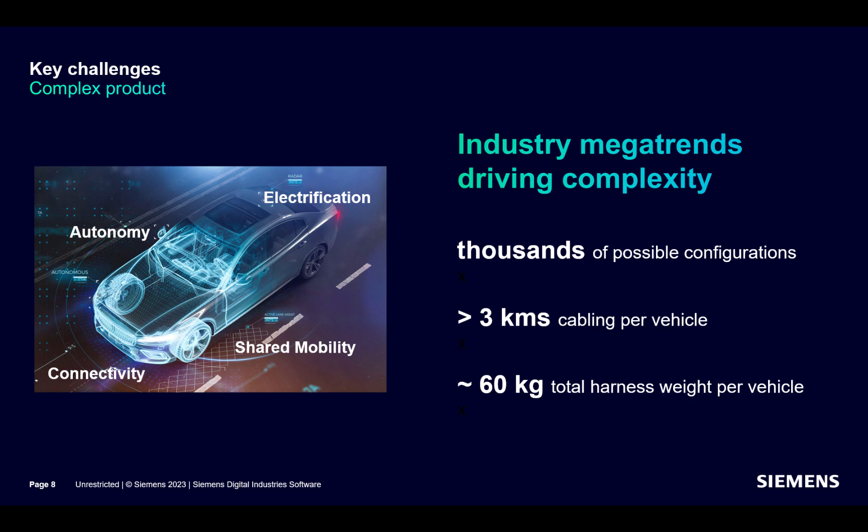This leads us to an obvious question. How prepared and equipped are we to manage such complexity? We understand that conventional wire harness design and manufacturing methods are starting to creak under the weight of the product complexity caused by automotive industry trends.

The need to ensure availability of consistent data and its seamless exchange between stakeholders is very important. But this can be a tricky job, especially with traditional siloed domains and disjointed engineering and manufacturing systems. This clearly impacts overall productivity of stakeholders.

Manual re-entry of data leads to error-prone and incoherent data throughout the flow, directly impacting product quality, and such mistakes cost money. This inadequacy also leads to longer cycle times and poses a serious challenge when it comes to adhering to budgets. Now, if that's the case with first-time designs, with the frequency of incoming changes we have today, change management for sure can be quite overwhelming.

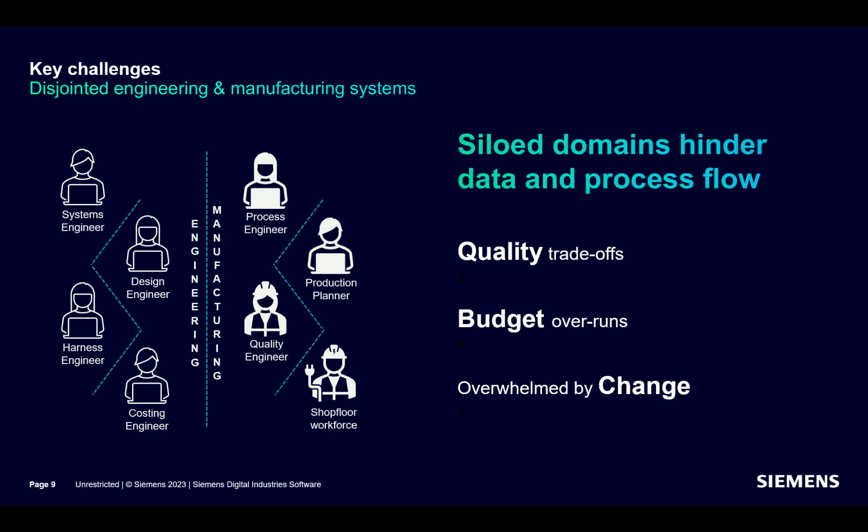In a highly price-competitive industry like the wire harness business, manufacturing efficiency is paramount, as it can directly eat into the bottom line. Optimizing production could mean either before the start of production or during change implementation, with traditional practices like prototyping and physical tryouts can be time-consuming, unsustainable, and above all, unprofitable.

The accelerating pace of program milestones also means that often engineers have little time to optimize the manufacturing process, leading to a suboptimal process. So most of the times, optimization efforts continue even after production has begun and can be even more challenging to optimize whilst ramping up.

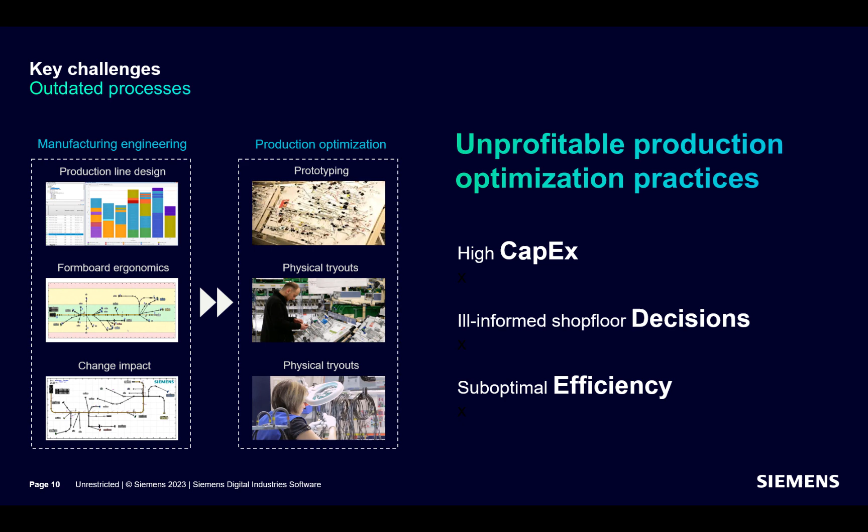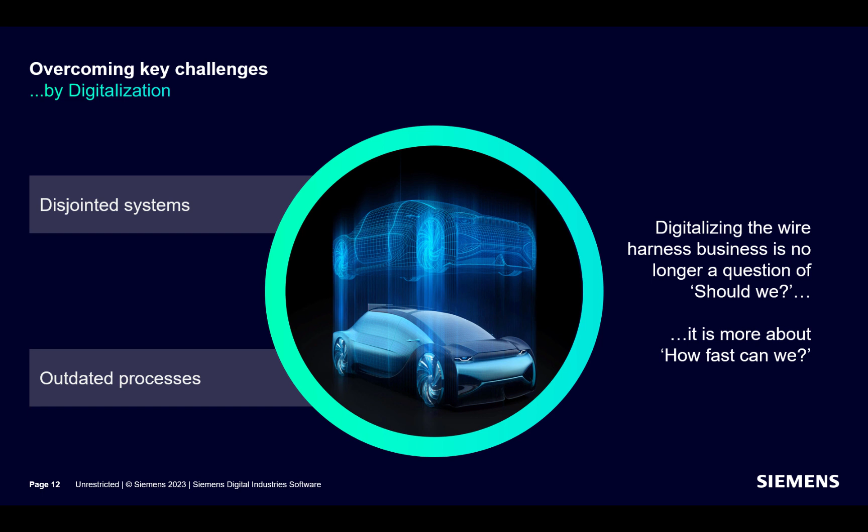Tackling such challenges while remaining profitable calls for a complete business transformation. But how? The answer lies in digitalization. Digitalizing the wire harness business is no longer a question of should we, it's more about how fast can we. And this is where the Siemens Accelerator can be of help.

Before we speak about how the Siemens Xcelerator can help digitalize your wire harness business, let's take a look at the Siemens philosophy of a true digital enterprise.

In a nutshell, it comes down to consequently combining the real and digital worlds with a comprehensive digital twin approach, and looking at the life cycle of both the product and production, thereby enabling a continuous loop of optimization. And with our digital enterprise approach, we do exactly that.

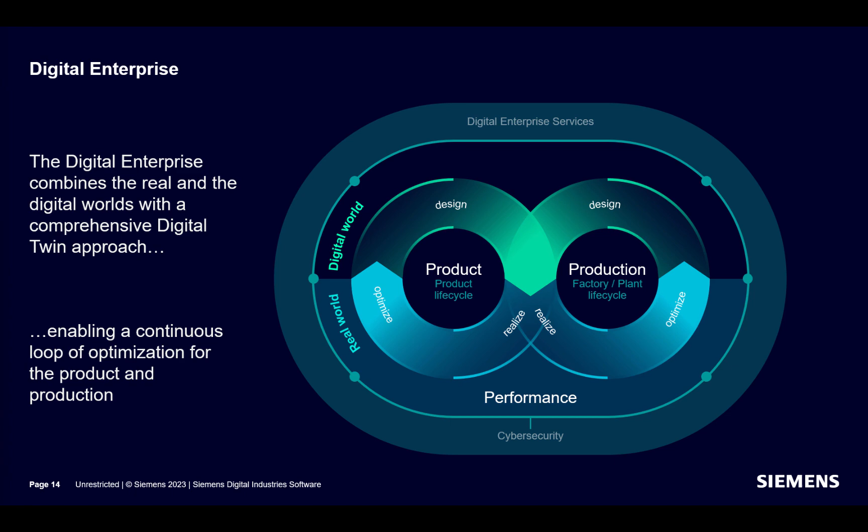By working with our comprehensive digital twin, you can integrate the entire product lifecycle and the factory or plant lifecycle, which were until now entirely separate worlds.

The digital twin of the product enables interdisciplinary collaboration and concurrent development to create an accurate virtual representation of a new product in no time. It comprises the MCAD, topology, schematics, and the harness designs.

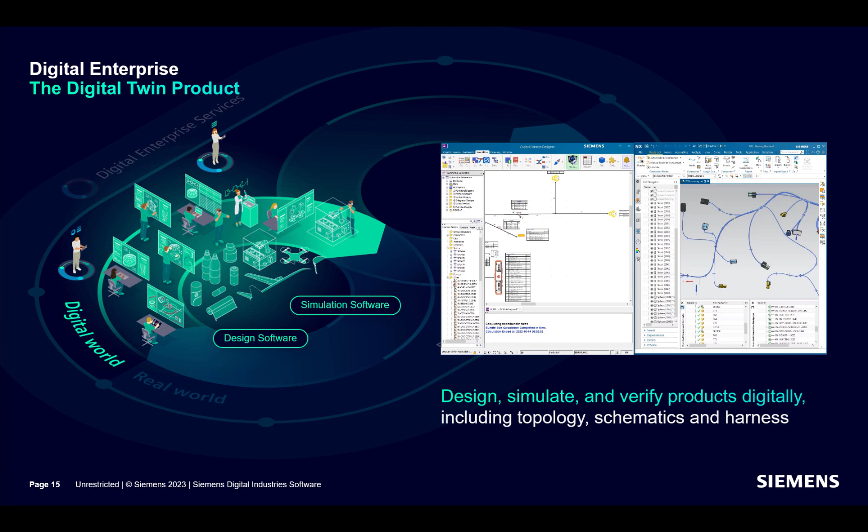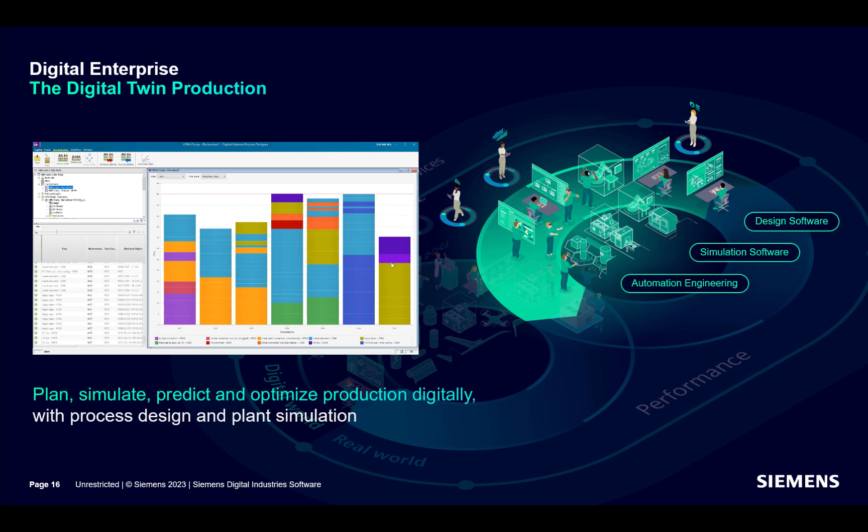The digital twin of production, on the other hand, comprises the manufacturing process design, a balanced distribution of tasks across workstations, and a virtual model of the shop floor, which is modeled to optimally manufacture the wire harness. Such realistic simulation of machines, lines, and complete plants is the foundation for flexible and efficient manufacturing.

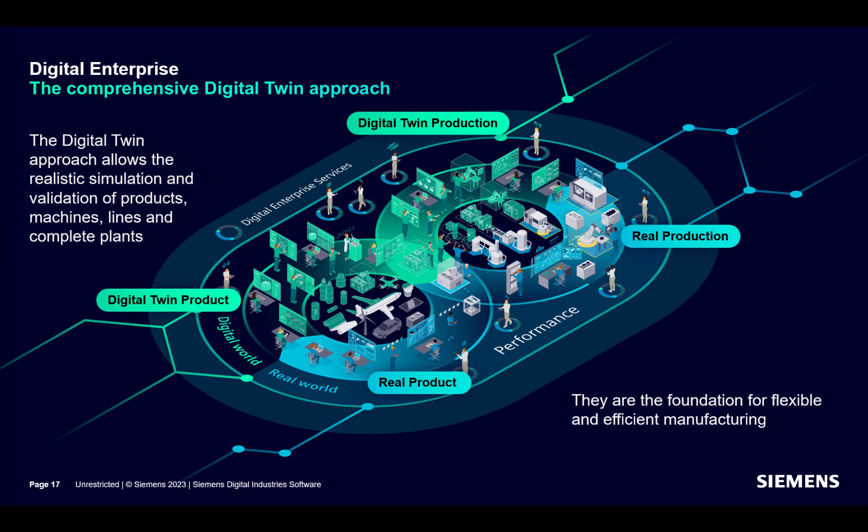By connecting the life cycles of the product and production, you enable a flow of data, which means that all stakeholders involved in the development of the product, the planning of the production, and the production itself always have access to the right information. The digital enterprise integrates both life cycles seamlessly, and the generated data, or the performance as we call it, enables a continuous loop of optimization both for the product and production.

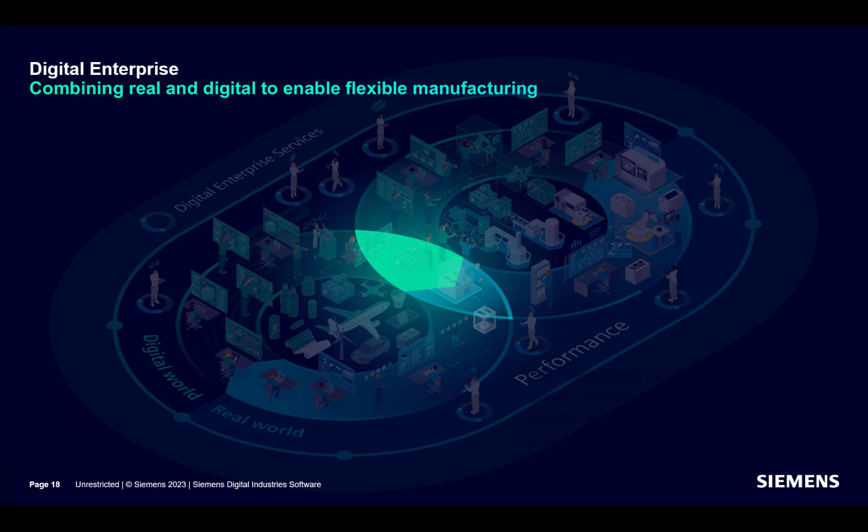Now that the product and the production process are designed, engineered, simulated, and validated in the digital world, we can actually make sure that everything works in the real world as planned and intended. The product design defines the engineering bill of materials, and by using the digital twin of production, the bill of process is generated. This way, the product and the entire production process can be simulated and validated well in advance, no matter where the product is finally manufactured. This ensures that it's always produced in the same quality everywhere, exactly according to the given specifications.

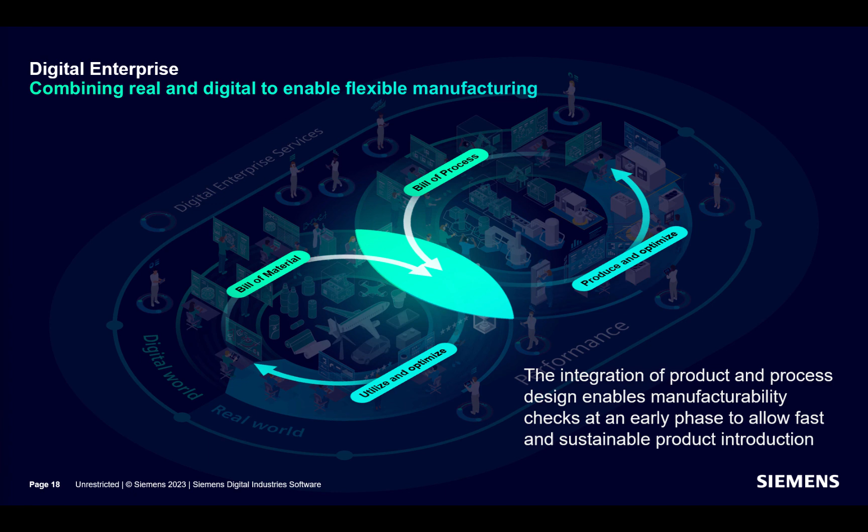What we have just seen is what we believe is a true digital enterprise. It's about having access to the unlimited power of data, gain valuable insights to make fast and confident decisions, and to create the best product and production. The comprehensive digital twin approach to design, simulation, and validation hence allows us to make it right the first time.

Now let's see how the Siemens Xcelerator can help digitalize your wire harness business.

Xcelerator is a portfolio of software, services, and an app development platform that speeds up digital transformation. Xcelerator enables customers to create their own comprehensive digital twin, flexible and adaptable to their own unique requirements and business models, using data and insight to predict and adapt products to future needs. For today's agenda, we shall look into the wire harness specific use cases from two unique products from the Xcelerator portfolio, Capital and Tecnomatix Plant Simulation.

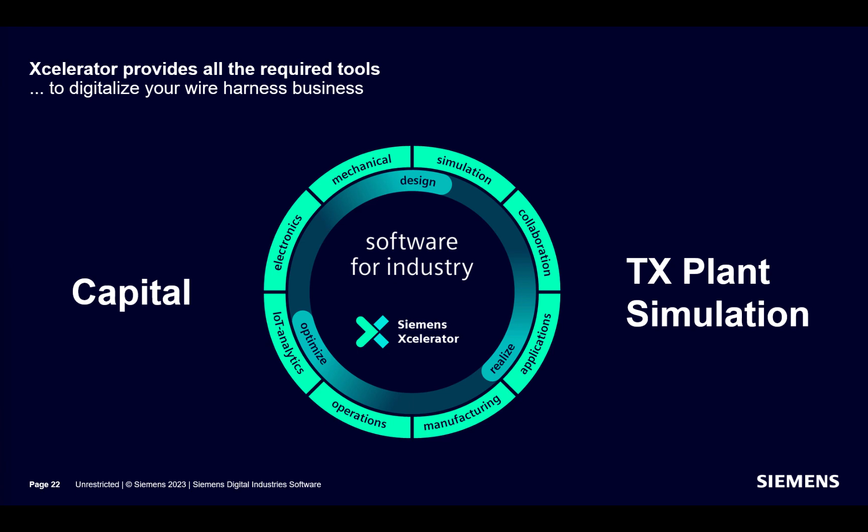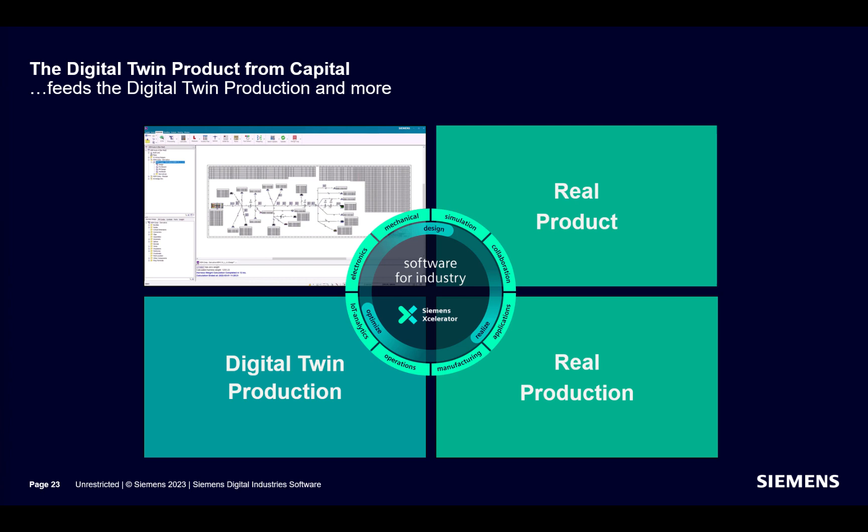Capital delivers the digital twin product. It comprises the architecture, topology, schematics, and harness design. And not only that, it also feeds necessary ingredients like the bill of process, the manufacturing bill of materials, and production line scenarios to design and validate the digital twin production. It also delivers manufacturing information and documentation like the form board drawings and operator work instructions required for use in real production.

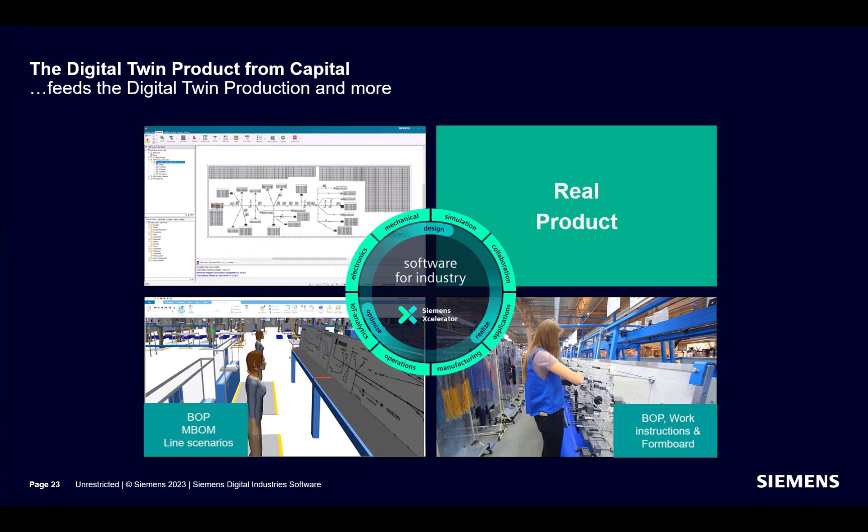And plus, it delivers technical and diagnostics documentation required to maintain the real product throughout its life cycle. The most important point to note here is that none of these entities are isolated. They are all connected and supported by a coherent digital thread.

Also, this data-centric approach ensures that all stakeholders always naturally have access to the right information. The use cases we will see today are focused on the left side of this quadrant, more on the digital twin product and its integration with the digital twin production, especially after a wire harness has been fully designed and engineered.

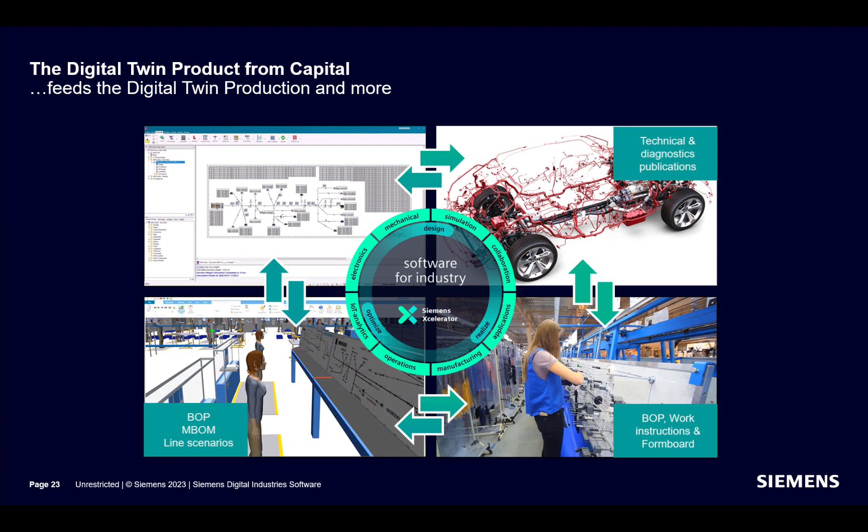For those of you who are familiar with Capital, the tool offers a powerful graphical harness design environment, enabling harness engineers to effectively capture and describe design intent to create fully detailed and validated harness designs rapidly and accurately. Such fully engineered harness designs are now ready for manufacturing engineering and costing. We shall now look into a few use cases, beginning with process design, costing, and balancing tasks in Capital, and later on, see the usage of the Capital bill of process and line scenarios to simulate production with plant simulation.

Manufacturing process engineers are often faced with the challenge of determining an efficient pattern of sequence process steps that result in the correct assembly of the target harness. Usually, more than one possible pattern will exist. The optimum choice depends on the specific manufacturing capabilities of the factory or factories in question.

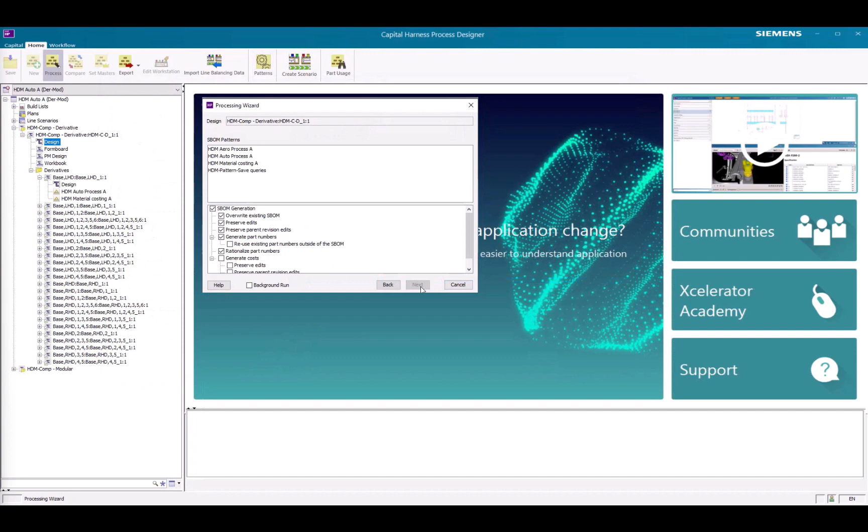Capital facilitates automatic creation of an efficient manufacturing scheme for each harness to be built by decomposing harness designs against previously captured descriptions of manufacturing capabilities, using a reasoning engine that incorporates wire harness assembly logic. Process engineers can rapidly and accurately synthesize harness build processes, tasks, manufacturing times, and more from a harness design.

An easy-to-use graphical process design tool generates multi-level builds of process and materials to feed downstream systems, thereby raising the efficiency of process engineers and reducing cycle times.

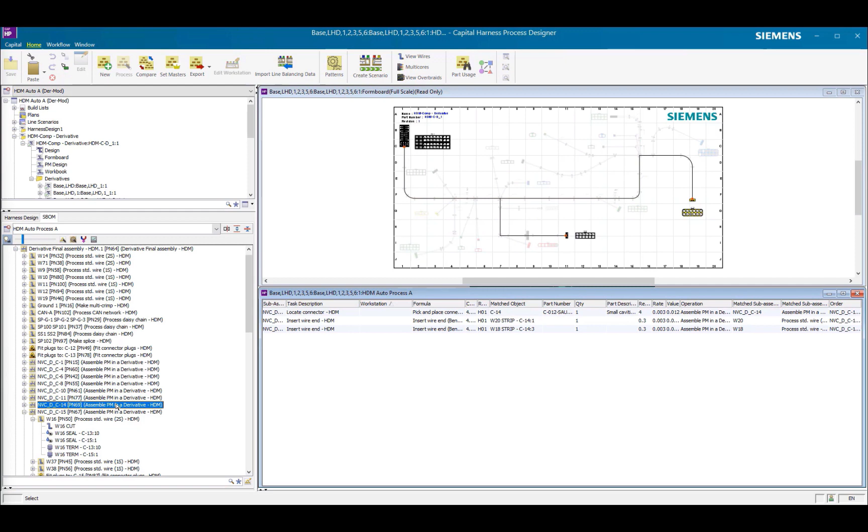Configurable operations, tasks, and factory models capture best practice process expertise that can be applied across multiple manufacturing sites, improving standardization.

Automated identification of common subassemblies eliminates subassembly duplication and cuts manufacturing costs.

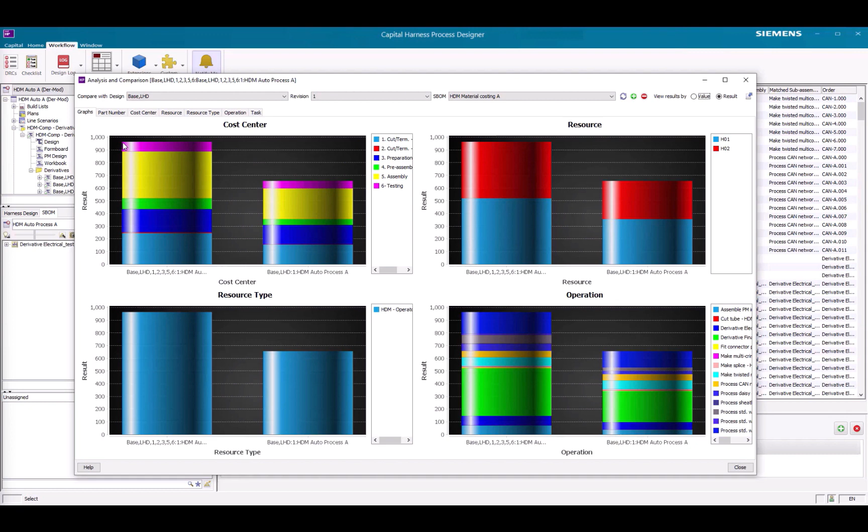Engineers can hence use Capital to capture and apply organizational IP and best practice techniques to manufacturing process planning and cost estimation tasks. It facilitates fast and accurate process planning, making time available for engineers to create multiple what-if scenarios to be compared with each other and analyzed for optimum manufacturing efficiency.

The generated bill of process and labor times can now be used to distribute and balance assembly tasks across workstations.

Manufacturing engineers can leverage capabilities offered by Capital to design efficient production lines, use existing manufacturing resources as effectively as possible, and quickly and accurately distribute manufacturing tasks across workstations on a production line.

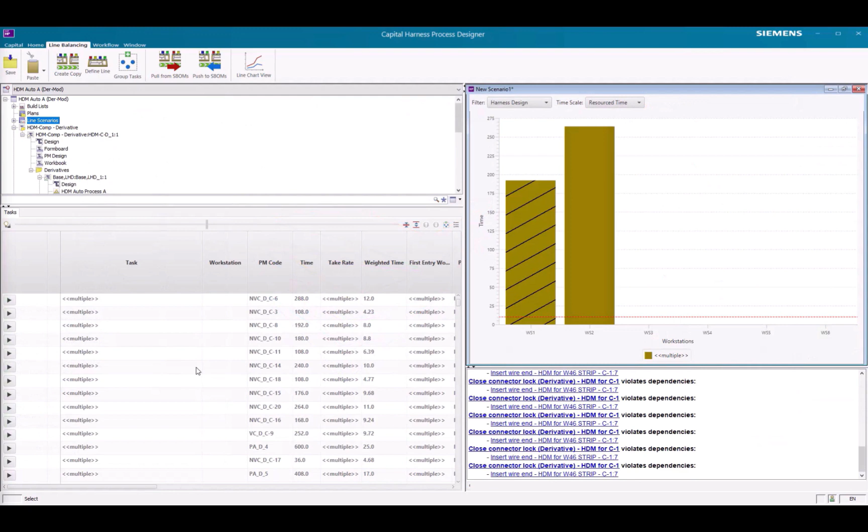Tasks can be assigned to workstations by simple drag and drop functionality, with constant guidance showing the earliest workstation where a task can be performed based on predefined task and material dependencies.

Warning messages immediately notify if a task is assigned to a workstation before the material is present or before a prerequisite task is complete. It lets engineers react quickly to new situations like changed take rates, helps inform better shop floor decisions, and ultimately reduces the time to profitability, thereby allowing time for multiple scenarios to be compared and analyzed for optimum efficiency.

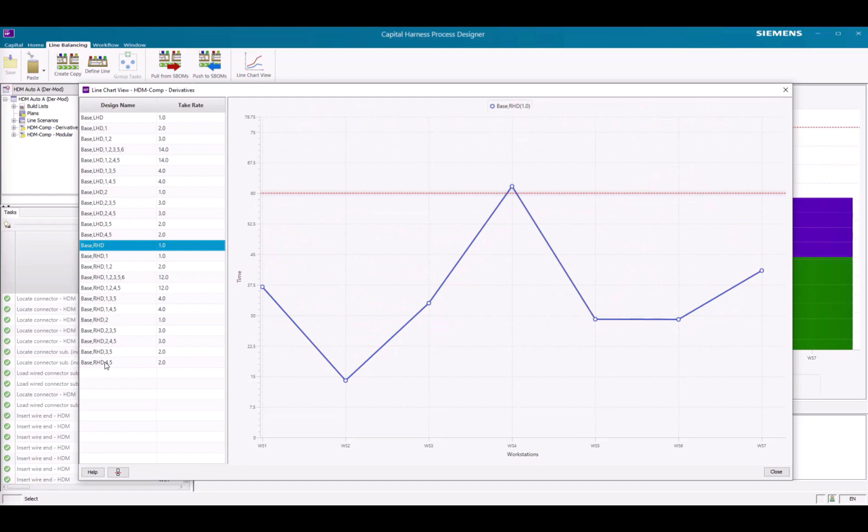Let us now see how the generated bill of process, labor times, and a balanced distribution of tasks across workstations can be used to simulate production.

As we have just seen, a manufacturing engineer working with Capital was able to design the entire manufacturing process and can now seamlessly deliver the resulting information to drive the digital twin of production, built based on the specific manufacturing capabilities of a given factory.

But before we can begin to simulate production using the plant simulation software tool, the plant model also needs to be fed with customer order and project relevant information like volume forecasts and take rates from an ERP system, for example. All this information can then be used to run a production simulation and virtually optimize production, all of this long before building the real production lines on the shop floor.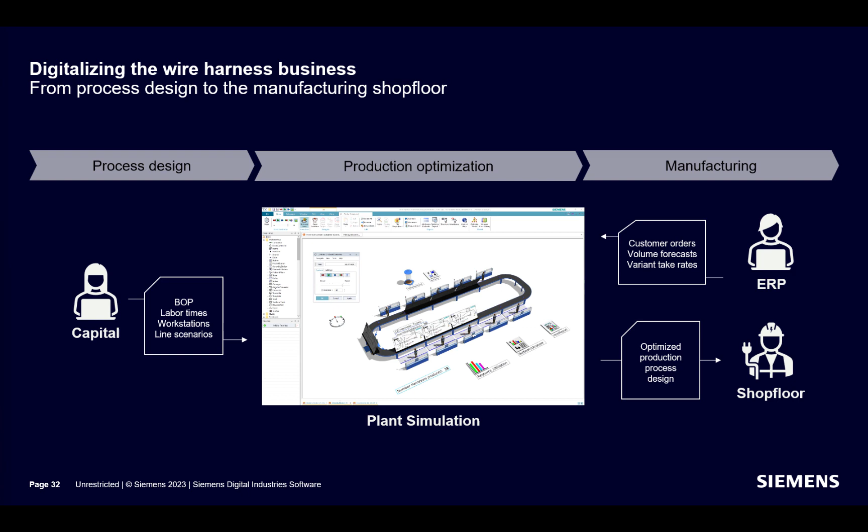Tecnomatix Plant Simulation is a tool used for simulation studies and experiments of material flow, operations, staffing, and logistics in any type of production. Plant Simulation equips engineers with a variety of tools and capabilities.

3D visualization helps validate and optimize production layout. Dynamic charts, on the other hand, let engineers monitor and optimize resource utilization. Sankey diagrams and bottleneck analyzer can be used to analyze and optimize material flow and throughput, while experiment manager and energy analyzer enable engineers to optimize the overall production process and energy consumption.

We shall now look at some of these example use cases.

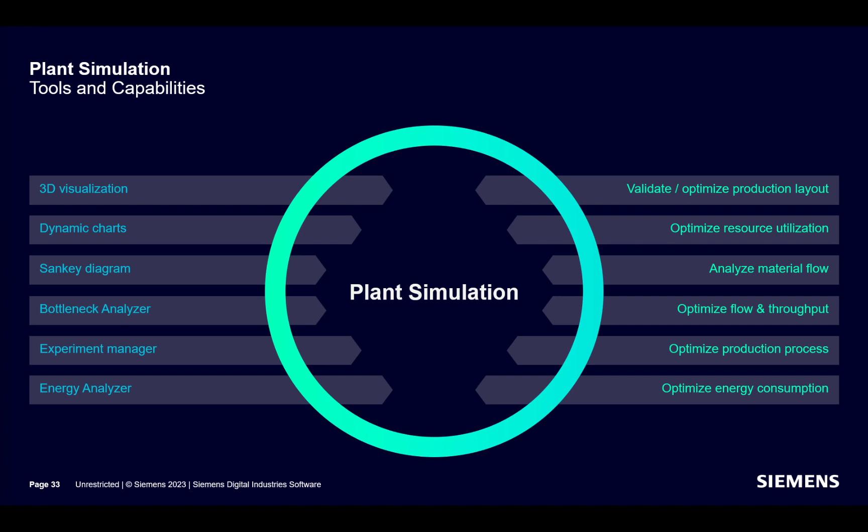There are several stakeholders, starting from the OEM to the Tier 1 harness manufacturer, that need to understand the layout and capabilities of a harness manufacturing facility. The 3D visualization feature lets users do exactly that, and more.

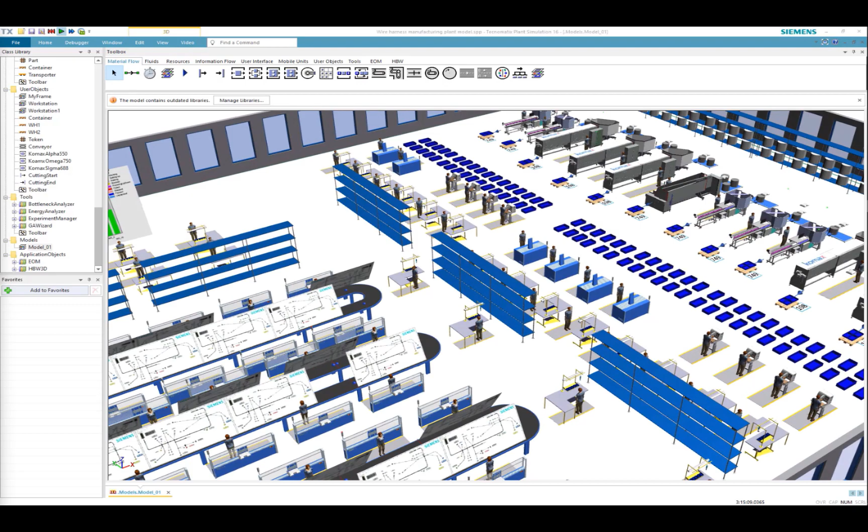This can be a very useful tool to virtually build and visualize an entire harness manufacturing plant. For example, in case of a completely new production site, it can help starting from the early conception phase with production layout design and CapEx or investment planning. Later on, it can be of significant help during the RFQ phase with shop floor square meter or space calculations. It can also be a powerful tool for harness manufacturers to virtually demonstrate production capabilities to customers, or to propose where a new production line can be added to accommodate a new product for a given customer. Today, most of this work is painstakingly done using legacy CAD systems, spreadsheets, and slides.

Resource planning and optimizing resource utilization, both human and machine, can be quite a daunting task, especially when the real production doesn't exist yet. Let's see how dynamic charts can help in this regard.

Dynamic charts such as these help users analyze simulated resource utilization statistics for the given production conditions. These statistics result from the simulation of a production flow, employing machinery and equipment modeled to replicate the specific manufacturing capabilities of a given factory.

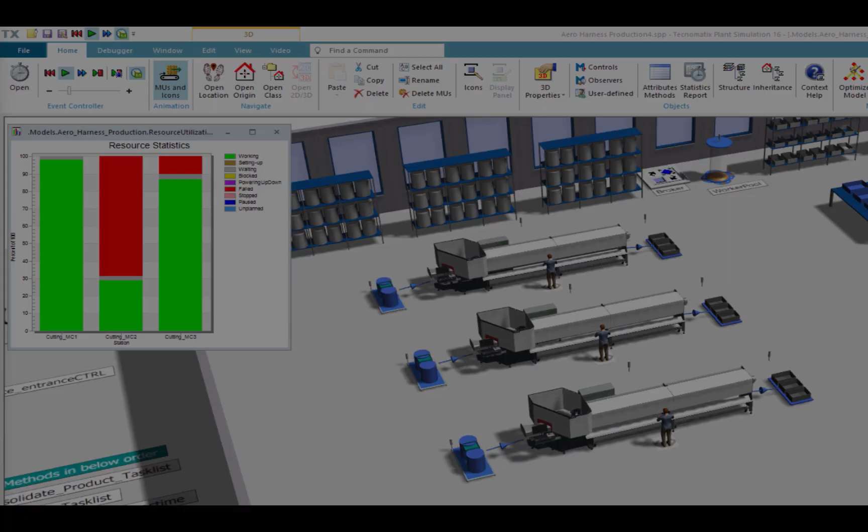These dynamic charts can also be used to analyze simulated resource utilization statistics for human resources, i.e., operators on the shop floor. In this scenario, we see operators working at assigned workstations, and in some cases also transporting material between workstations. From what we previously saw, based on the bill of process from Capital we've fed this digital twin of production with, each workstation has assigned tasks.

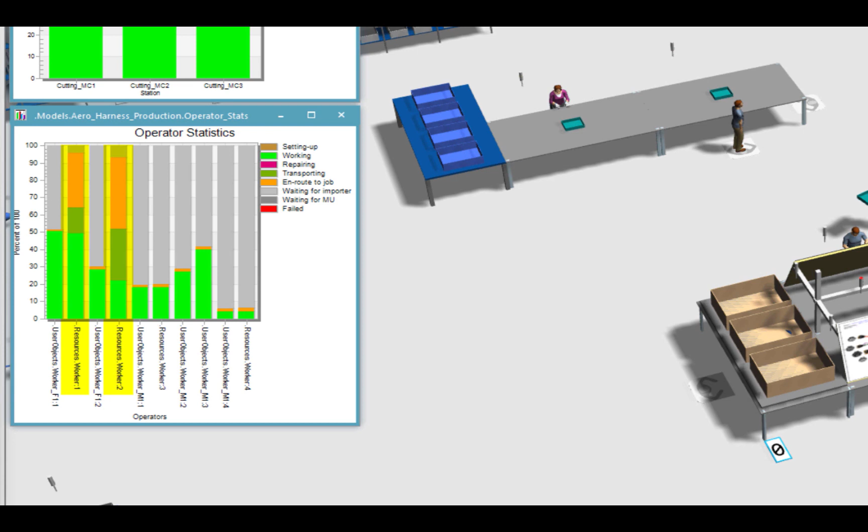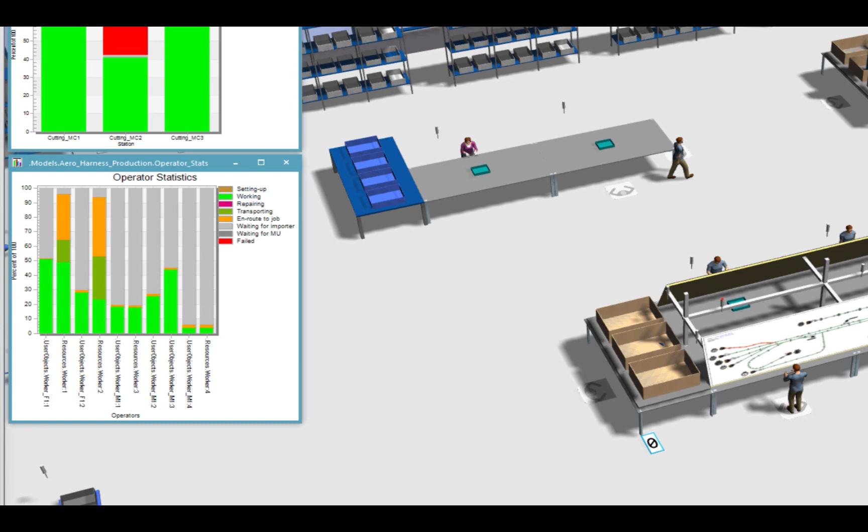But there could be several other factors like the production layout and flow that influence how a certain resource is utilized on the shop floor. Analyzing resources in such detail might not be possible unless there are physical tryouts or prototypes. Whereas these dynamic charts, for example, can be really helpful in identifying the share of non-value-added tasks performed by a specific resource just by the click of a button.

All of that virtually. Here, for example, we have a first operator moving material from one subassembly workstation to the next. A second operator is then seen transporting material to the final assembly lines.

It is quite obvious in this case, the second operator has to cover a long distance returning to his workstation. The tool hence enables users to spot such potential for optimization early in the planning phase and lets manufacturers produce more with the given resources.

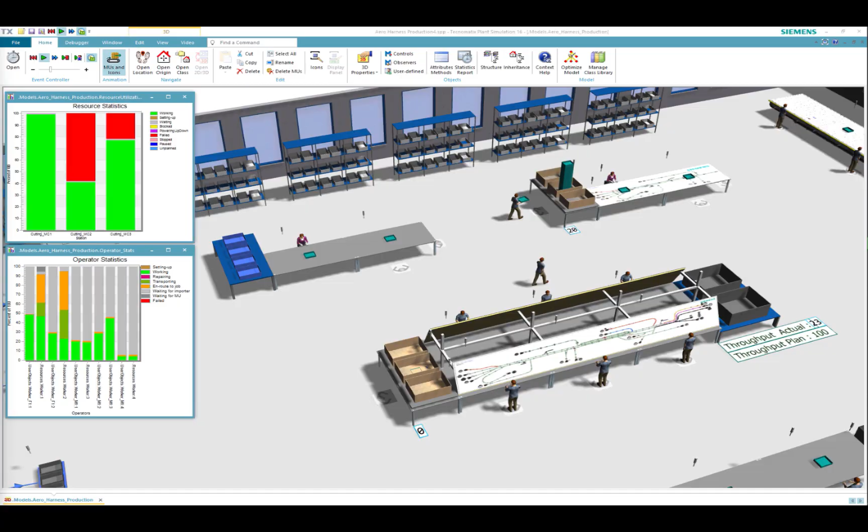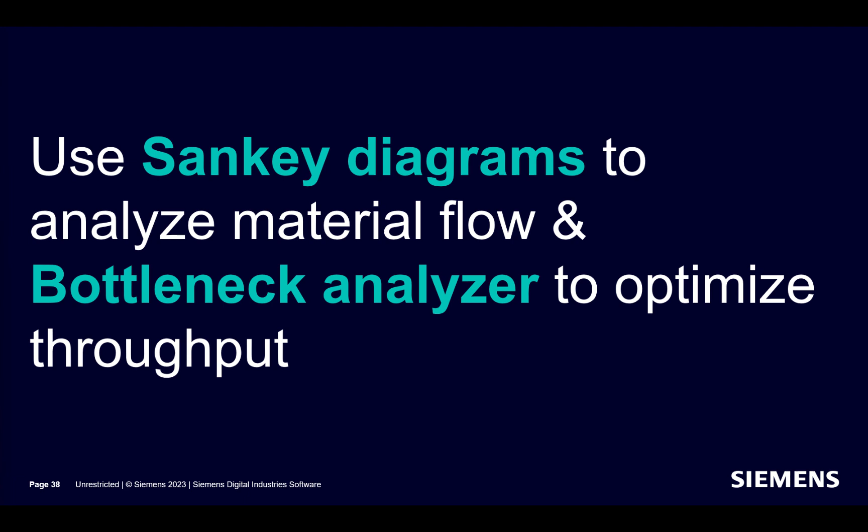Just like the previous use case with analyzing resource utilization, analyzing material flow and identifying bottlenecks early in the planning phase can be quite the challenge. This is where plant simulation could help.

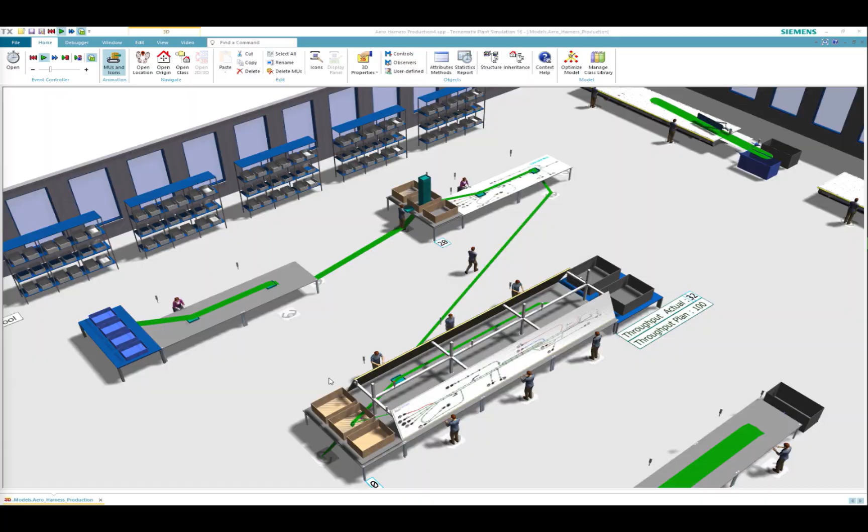Sankey diagrams enable users to quickly visualize the amount of transported materials and let them easily identify potential transportation or logistical problems. In this case, the Sankey diagram shows material flow between the subassembly workstations and to the final assembly lines.

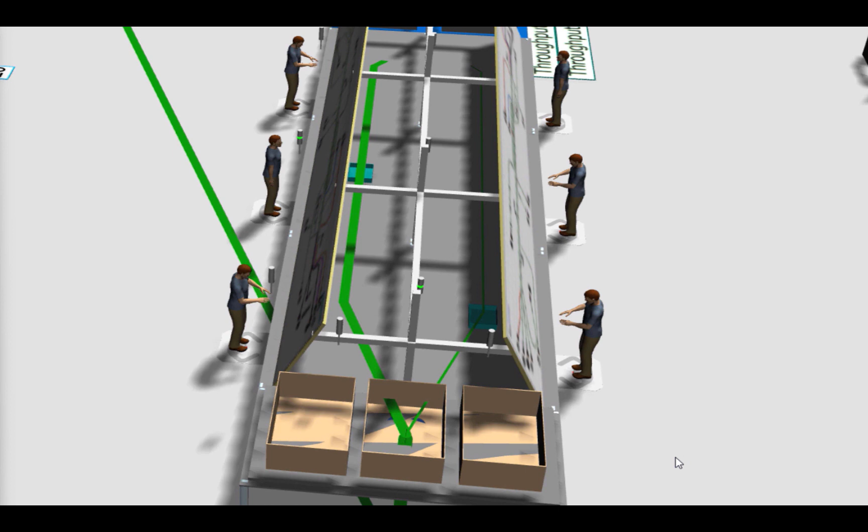A thinning of the Sankey line along one side of the final assembly stations indicates a potential material flow problem in that area. But at this point, we do not know what is causing the problem and exactly where it is happening along that line. For this purpose, we might need additional information, and this is where the bottleneck analyzer could be of help.

The bottleneck analyzer helps identify bottlenecks at any time through a graphical representation of the utilization at each resource. It helps detect and eliminate problems that otherwise would have required costly and time-consuming correction measures.

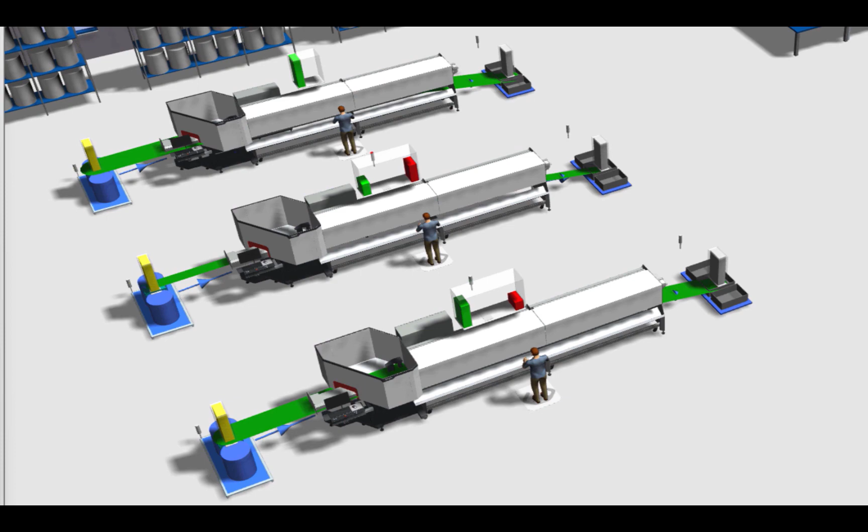Using this functionality in our use case, we are now clearly able to see a potential bottleneck at the first workstation. In reality, there might be several factors causing such a bottleneck, like for example, an overloaded workstation caused by additional tasks from harness variant combinations produced on the same line.

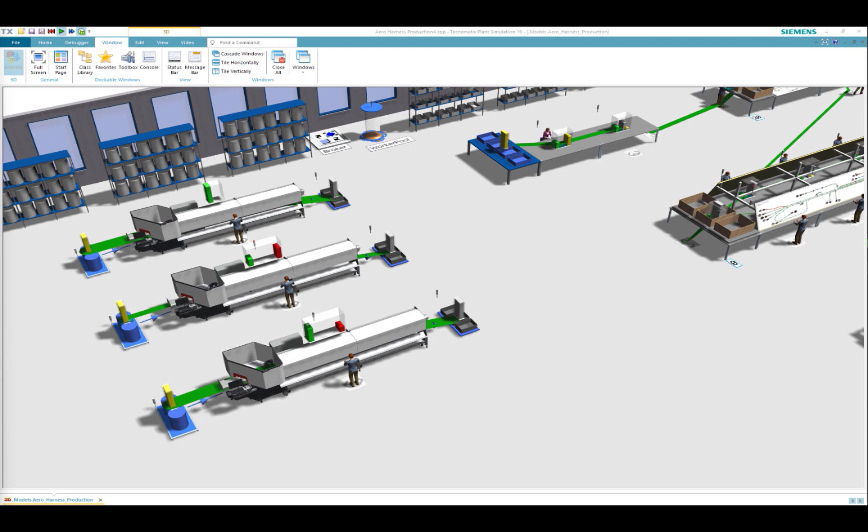In our case though, further investigation shows that the operator assigned to that workstation is modeled at a lower operating efficiency, indicative perhaps of newly trained personnel. In this case, remedial measures might be required to avoid this bottleneck during production ramp-up.

So it's very clear that a data-centric digital twin approach in the context of the wire harness business lets all the stakeholders involved in the development of the bill of process, calculation of labor times, balancing of tasks, and simulation of production always have the right information.

And not only that, the digital enterprise integrates both the product and production lifecycle seamlessly to enable a continuous loop of optimization.

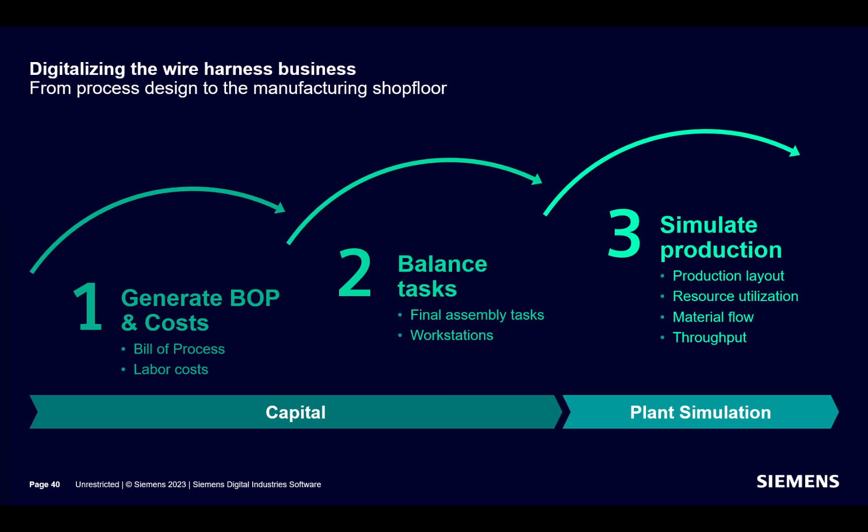To summarize what we've seen today, tackling growing product complexity and costs while working with disjointed systems and outdated processes can hugely impact quality and profitability.

We can help you transform these challenges into competitive advantages by replacing disjointed systems with data-centric and integrated workflows, and by replacing outdated processes with digital twins and a closed loop for continuous optimization.

Siemens Accelerator can clearly help you digitalize your wire harness businesses and become true digital enterprises with speed and at scale.